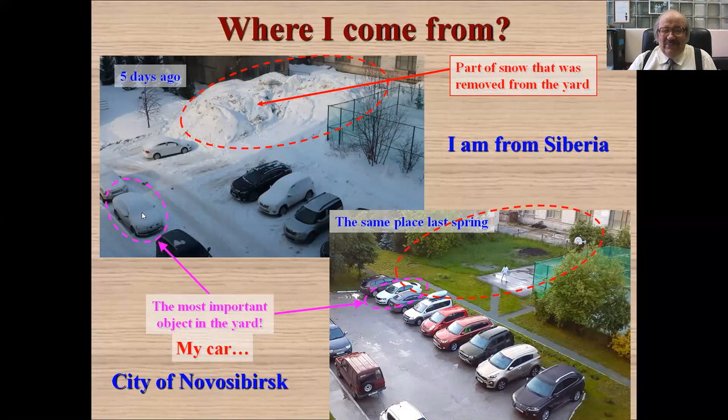I'm glad that this seminar is joined with the Australian Fluid Mechanics seminars. But I'm not from Australia, I'm from Siberia, which is also quite an interesting place. I'll show this picture just so you can see what we had five days ago: a huge heap of snow just removed from the yard, which started melting yesterday or two days ago. The same place in spring looks like this - so this is just snow. And the most important object in this picture is my car, standing under the snow here in the yard.

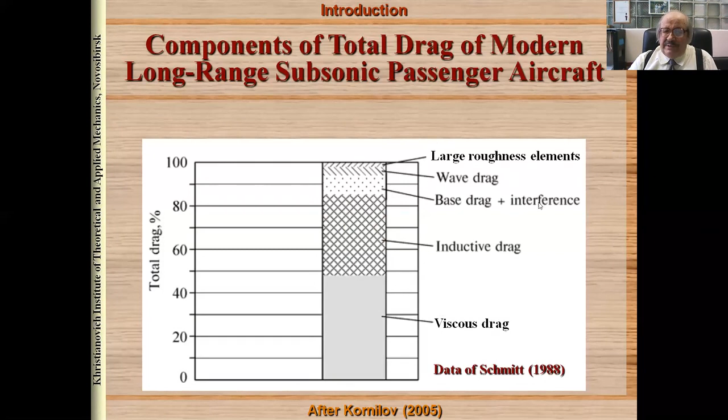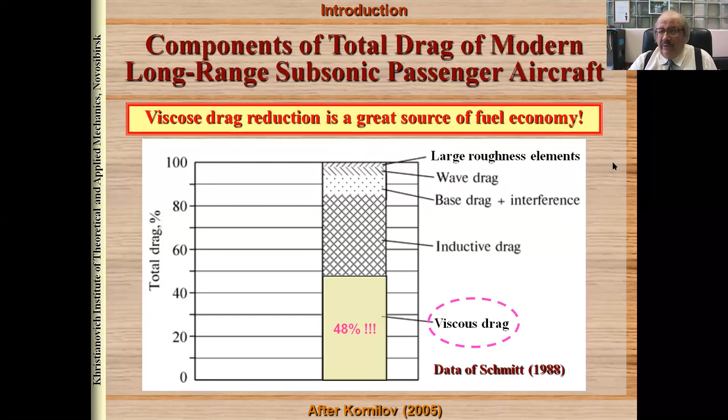I want to show this classical graph: skin friction coefficient versus Reynolds number for a flat plate. The upper curve corresponds to turbulent flow, and the lower corresponds to laminar flow. Modern airplanes fly approximately at these large Reynolds numbers. For large airplanes, the difference between turbulent and laminar friction is more than one order of magnitude - a very significant difference. It remains large even for small airplanes and gliders.

If we look at the boundary layer going from the leading edge downstream, initially the flow is usually laminar. Then we have transition to turbulent flow and friction increases dramatically. If we're able to postpone transition, then in a certain Reynolds number range we have so-called laminarization, and the friction is reduced dramatically. This is already partly achieved for small airplanes and gliders - they have laminar flow around a significant part of their surface, and due to this, the skin friction is very low.

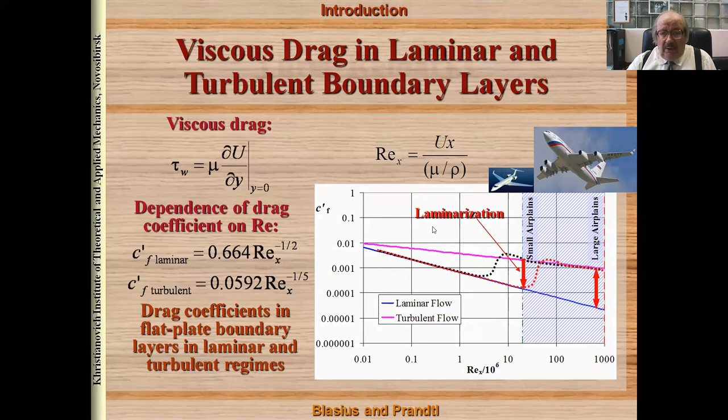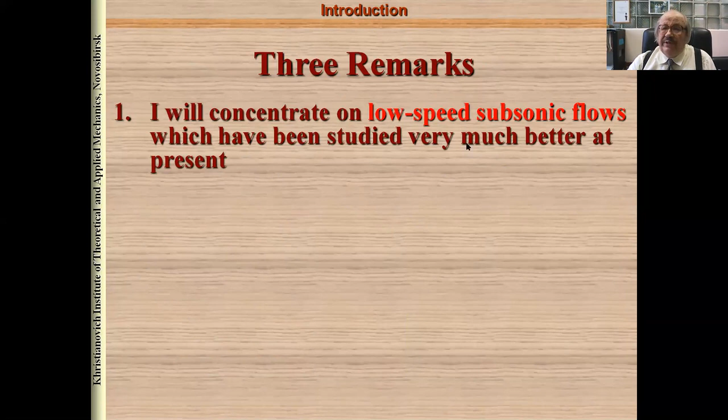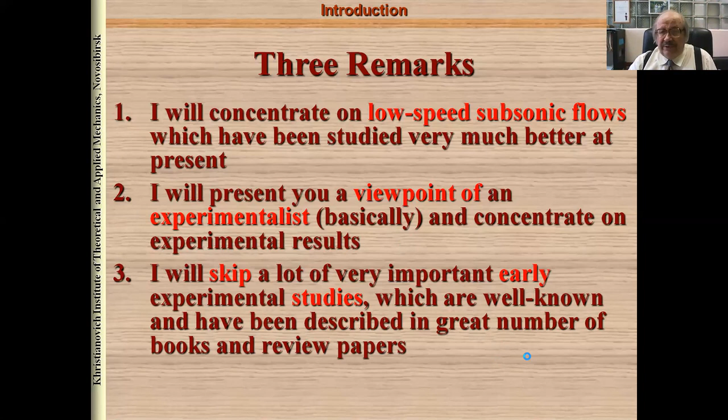Prior to starting the main part of my talk, I want to make three remarks. First, I will concentrate on low-speed subsonic flows, which have been studied much better at present than transonic flows. Second, I will present the viewpoint of an experimentalist, and concentrate on experimental results. Third, I will skip a lot of very important early experimental studies, which are well known and described in a great number of books and review papers, and concentrate on relatively recent data obtained during past years.

A swept wing boundary layer has several kinds of instabilities, which I will try to describe now. This is actually what swept wing means - an idealized arrow-shaped wing, idealized in the sense that nothing depends on the span-wise coordinate. This is a plan view, so all geometrical parameters are the same in the span-wise direction. The potential flow also has a very special property.

If we decompose the velocity vector into two components, the span-wise component, parallel to the leading edge, is constant everywhere in the whole flow field, excluding the viscous boundary layer. This constancy is often called the sweep condition. The sweep condition is satisfied for an infinite-span swept wing at any sweep angle. The other component, perpendicular to the leading edge, is of course not constant.

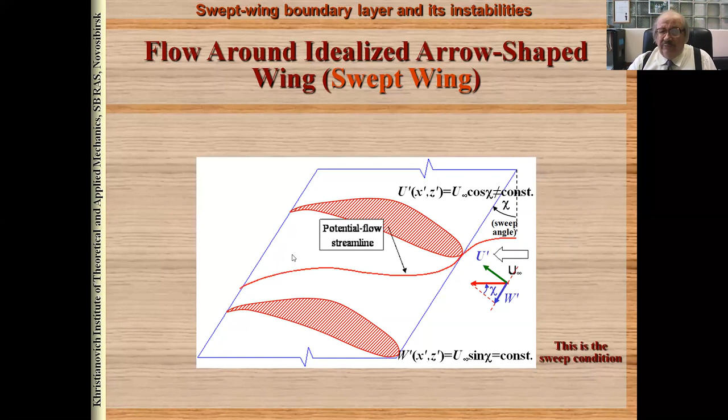The flow accelerates initially, then decelerates, and therefore the shape of the streamline of the potential flow and viscous flow is curved - so-called S-shaped. This curvature is produced by pressure gradient forces, shown here. The same forces act on fluid particles inside the boundary layer, which have lower speed due to viscosity. But since the same force acts on a particle with lower speed, the trajectory changes differently. Therefore, inside the boundary layer, the particle trajectory deviates from the trajectory outside, and this mismatch leads to the appearance of so-called crossflow, directed as shown here - this near the leading edge, and this near the trailing edge.

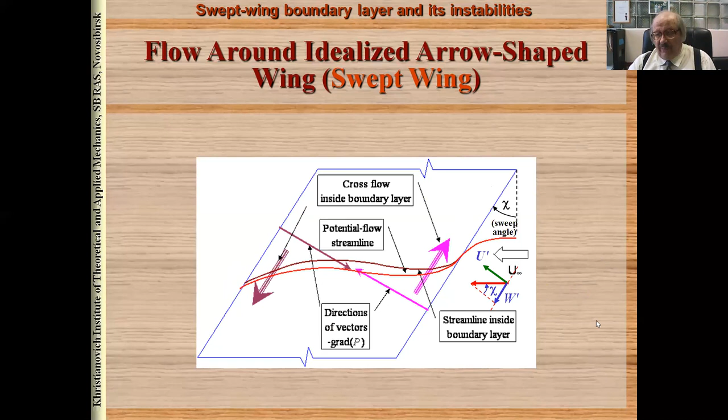Inside the boundary layer, we have a mean velocity profile which is rotating, I would say. The vector is rotating as we approach the wall. At the boundary layer edge, this is a coordinate system with a prime, which is coupled with the velocity at the boundary layer edge, directed as shown here, then closer to the wall the direction is changing. We can decompose it into the component in the direction of the potential flow and an orthogonal component. The orthogonal component is the crossflow itself.

And this profile has an inflection point, and this is always a sign of additional instability. This flow in 3D, in this 3D boundary layer, is usually more unstable compared to the corresponding 2D boundary layer. So there are several instabilities of this flow.

First, when the flow just touches the leading edge, if the thickness of the aerofoil is large, then we have a boundary layer flowing along the leading edge. And this boundary layer can be unstable.

This instability is often called attachment line flow instability. Then further downstream, we have a region of so-called favorable pressure gradient when velocity increases. Here, we can observe basically two kinds of instability: crossflow instability and streamline curvature instability.

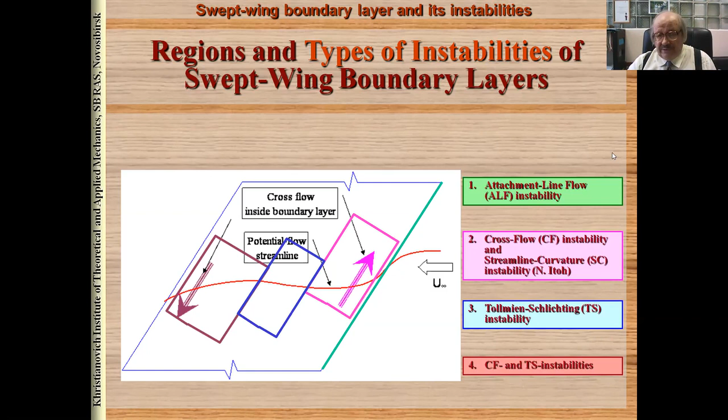Further downstream in the region of nearly zero pressure gradient, Tollmien-Schlichting instability may occur. And closer to the trailing edge, we often have a competition between crossflow instability and Tollmien-Schlichting instability. They both can play a significant role.

But for so-called long laminar run airfoils, the region of favorable pressure gradient is enlarged. The main goal is to suppress Tollmien-Schlichting instability. But the same pressure gradient which suppresses Tollmien-Schlichting instability leads to intensification of crossflow instability. The stronger the pressure gradient, the greater is this instability.

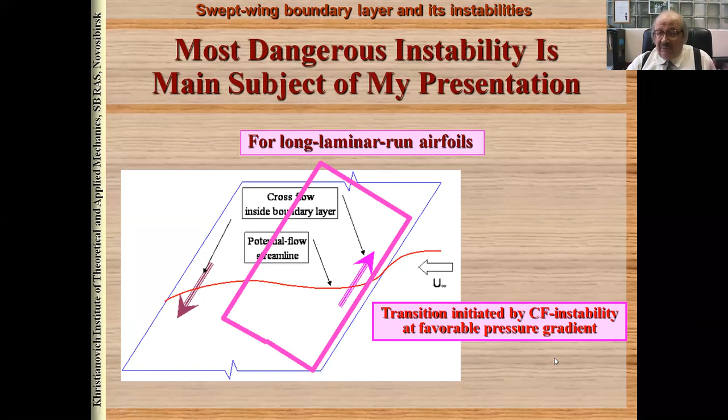In my talk today, I will concentrate on this kind of instability, despite I'll touch also some Tollmien-Schlichting instability as well. So how do the crossflow instability modes look like?

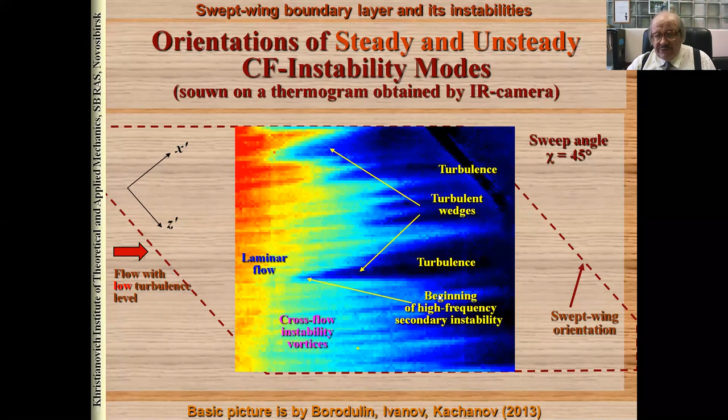I will illustrate this on this picture. This is a visualization obtained by infrared camera on a 45 degree swept wing in our institute, in our group. In case of low turbulence level, we have turbulent flow here, laminar here. We can see turbulent wedges. And the crossflow in this case is directed as shown here inside the boundary layer.

This arrow shows the local direction of the potential flow velocity vector. Stationary crossflow instability modes, which also can be amplified as zero frequency modes, usually have the axis of vortices nearly parallel to the local direction of potential flow, but not exactly. They always deviate from it by approximately 2 degrees.

But there are also traveling crossflow instability modes, which can be amplified by the instability mechanism. The most dangerous of them are indicated here. They exist in a range of propagation angles, and they propagate like shown here. So they propagate in the direction opposite to the crossflow direction. And in fact, they approach the leading edge of the airfoil.

There is another group of crossflow waves, or unsteady crossflow instability modes, which propagate in the direction of the crossflow and towards the trailing edge of the airfoil. But this second group of traveling crossflow modes, the flow is less unstable with respect to this group, so it's usually less dangerous.

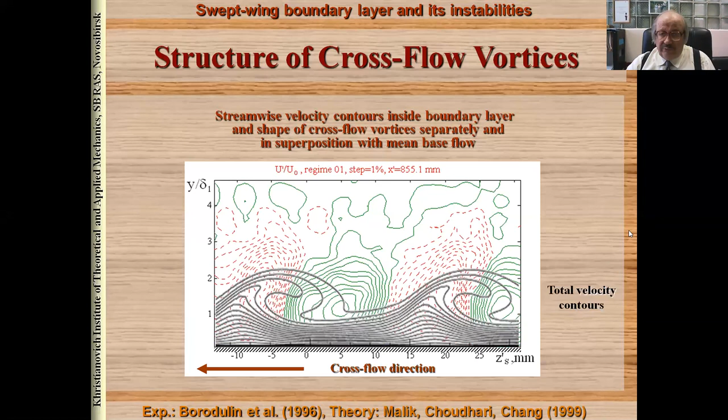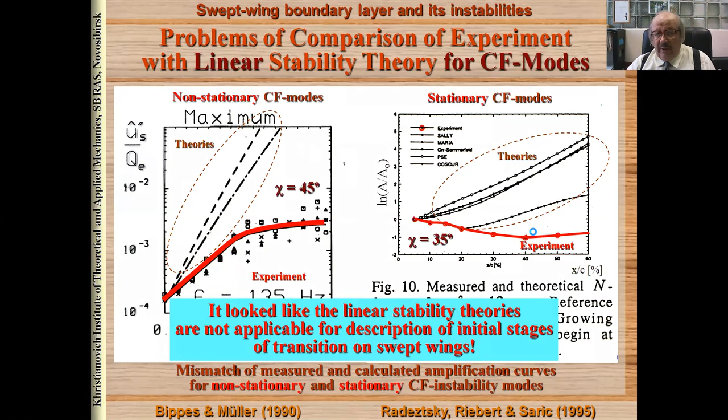Red curves show experimental amplification curves, the distribution of amplitude in the chordwise direction, while other curves display theoretical results from linear stability theory. We can see very significant mismatch of this data. It looked like linear stability theory is not applicable for description of initial stages of transition on swept wings.

We started our experiments on cross-flow instability in the end of the 80s, and the majority of experiments were carried out in this wind tunnel of our institute in Novosibirsk, called T324. This is a very good low turbulence wind tunnel, and this is our first experimental model.

We accepted and used the idea of Bill Saric. Instead of a real swept wing, we made a swept plate, and the pressure gradient along this plate in the chordwise direction was induced by a contoured wall bump. We also added side walls, which help diminish the influence of the test section walls and provide better satisfaction of the infinite swept wing condition.

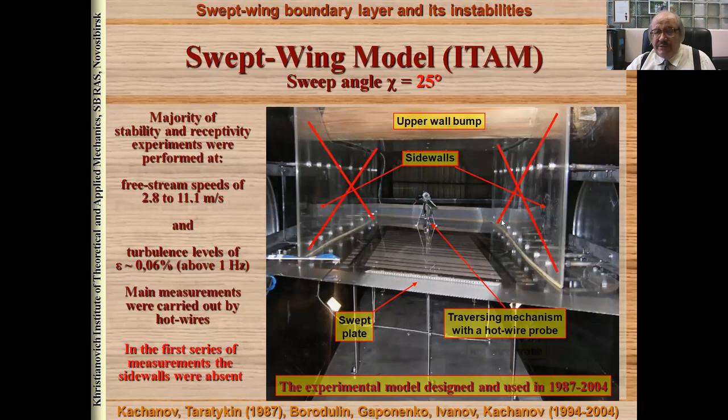In the first experiment, this was for a sweep angle of 25 degrees, and side walls were absent. Then we designed another model for 35 degrees, with a very similar design.

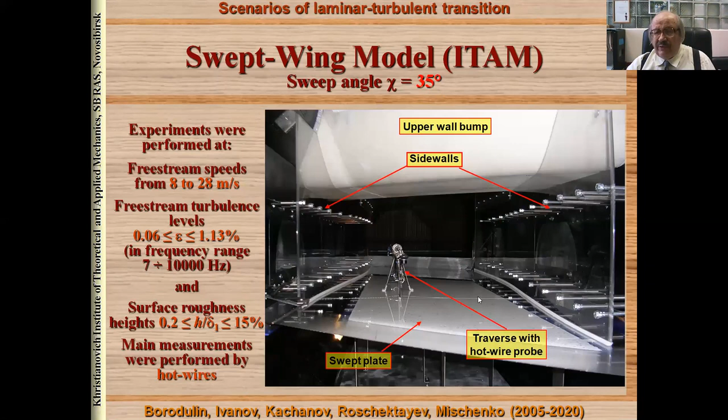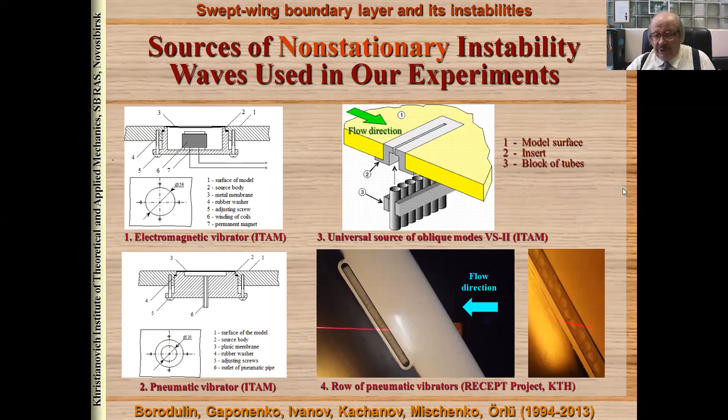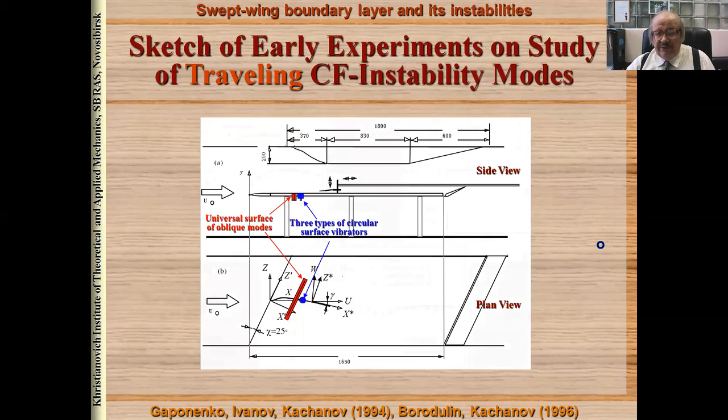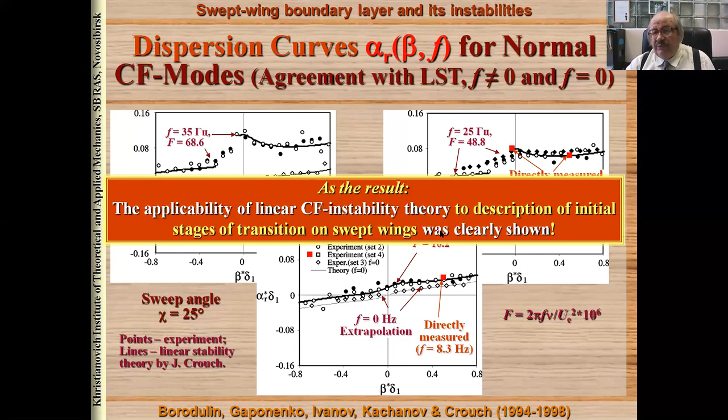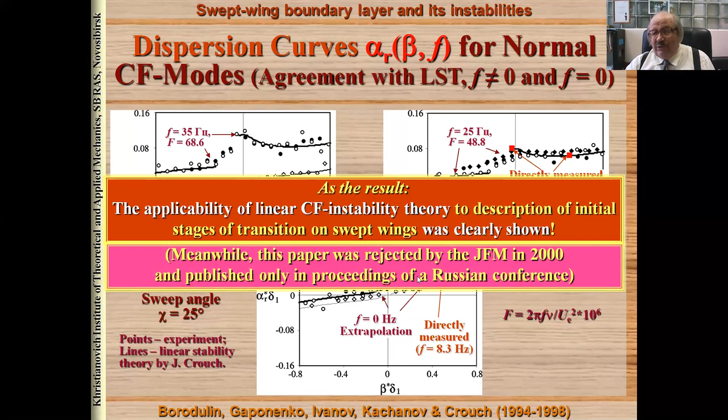As a result, the applicability of linear crossflow instability theory to description of the initial stages of transition on swept wings was clearly shown in these experiments. But unfortunately, this paper was rejected from JFM in 2000, although the results were obtained in 1995. It was published only in the proceedings of one of the Russian conferences.

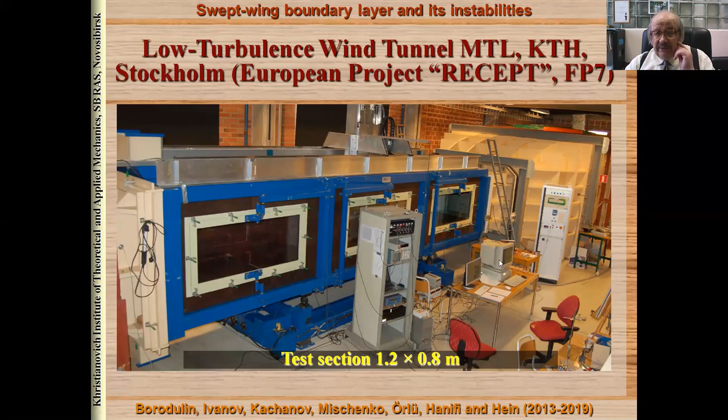Later, we repeated similar experiments, but not on a swept plate, on a real swept wing. These experiments were carried out in the framework of the European project RECEPT, Framework Program 7, in Stockholm, in the MTL low turbulence wind tunnel. This is our experimental model, equipped with a 35 degree swept airfoil section, and it was equipped with side walls to provide better satisfaction of the sweep condition.

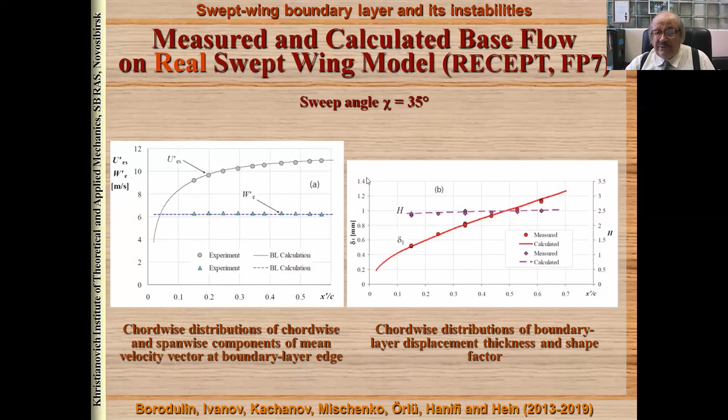Our theoreticians, Ardeshir Hanifi and Stefan Hein, performed calculations, the same for the boundary layer, and as a result we obtained perfect agreement between theory and experiment.

I show here amplification curves, circles, and the stream-wise, chord-wise distribution of the phase of perturbations for two different span-wise wave numbers and one fixed frequency, and this is the same for another frequency, very low, actually 2 Hertz. Curves are calculations, points are our experimental results. We have very good agreement between theory and experiment.

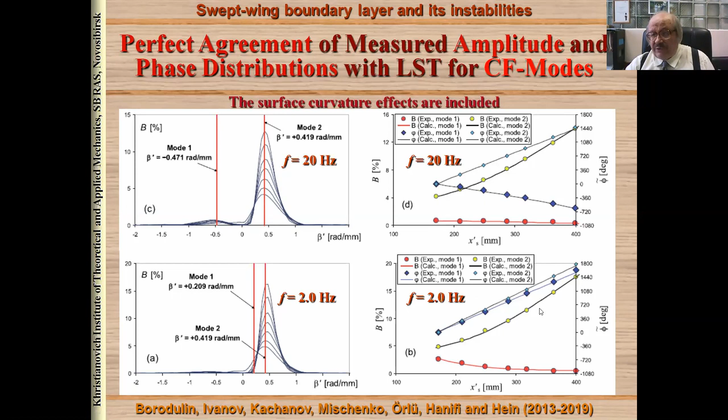2 Hertz is what we call a quasi-stationary regime, because the flow passes several times through the whole region of our measurements during one cycle of oscillation. So in effect these are crossflow vortices, very low frequency disturbances.

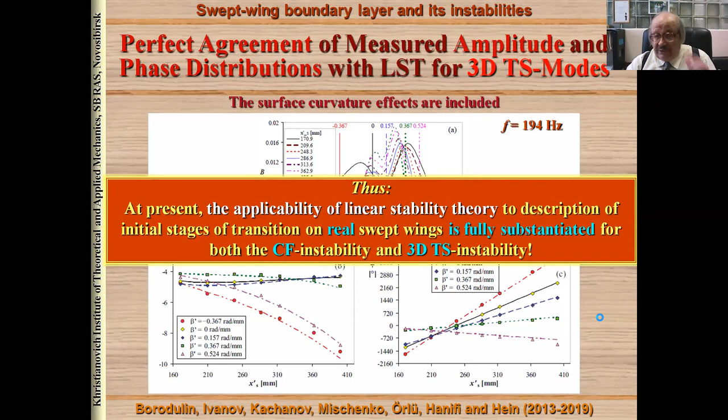The next section of my talk is about mechanisms of excitation of instability modes. Such mechanisms are usually called receptivity mechanisms. This is the problem of receptivity of the base flow to external perturbations of different kinds. This problem is very complicated.

You see we have a lot of mechanisms, and if you want to predict, to calculate correctly the transition location, we must know which of these mechanisms are important and which are less important. Of course, the importance depends on the base flow characteristics and disturbance characteristics. So this is not a simple problem at all. In our experiments we investigated a lot of these mechanisms.

I will illustrate these results for two cases. The first case is receptivity to surface non-uniformities, either stationary or non-stationary, meaning vibrations.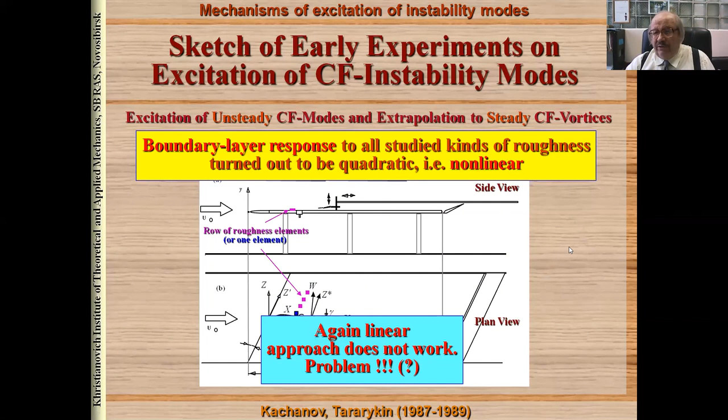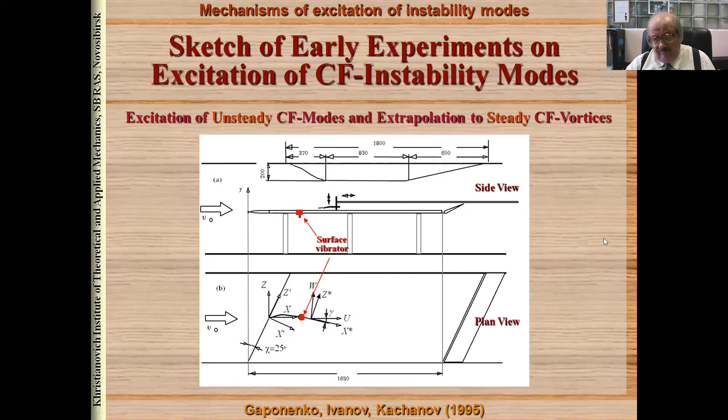We were not able to obtain results, and it looked like we could not investigate the linear receptivity problem and check the validity of linear receptivity approaches. But we decided to do it differently. We decided to replace our stationary disturbance sources by non-stationary ones, first of all by surface vibrators, and then we studied receptivity with respect to non-stationary perturbations. We got quite good results.

Then we found that the receptivity coefficient, defined as the ratio of the initial spectrum of disturbances divided by the resonance spectrum of surface vibrations, depends nearly linearly on frequency. We extrapolated our data to zero frequency and obtained in this way the receptivity coefficients for stationary modes, for steady surface roughness and stationary vortices.

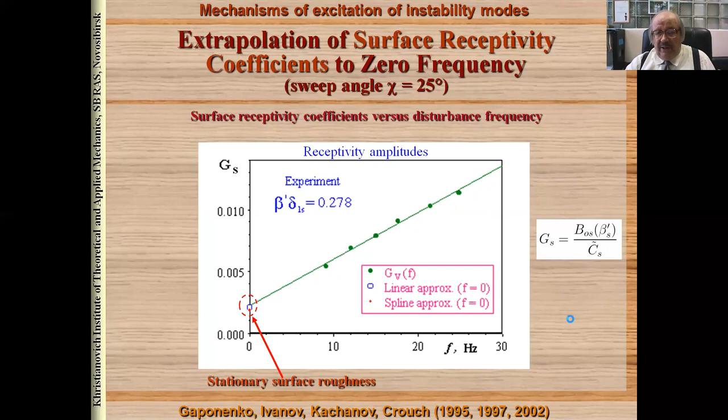And the result we compared again with calculations by Jeffrey Crouch. You can see here the initial spectrum and here the receptivity coefficients. Taking into account the great complexity of obtaining this coefficient, which includes extrapolation of data upstream to the position of the source, we think that this agreement is rather good.

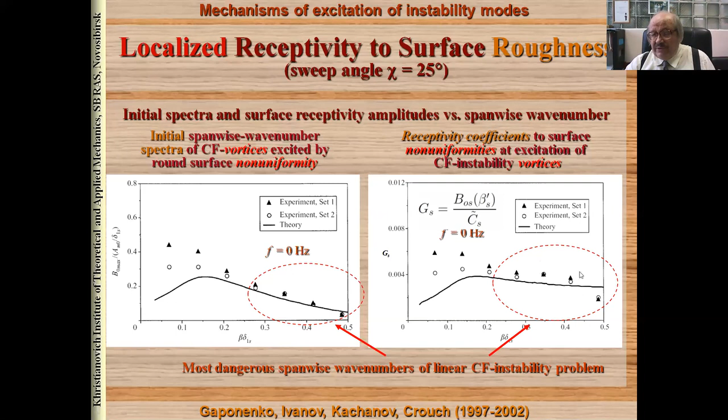This result shows that it was actually the first evidence of applicability of linear receptivity theory of a swept-wing boundary layer to surface non-uniformities at excitation of crossflow instability modes, both stationary and non-stationary. This paper was published in JFM in 2002.

Another important receptivity case I want to show you is receptivity to incident flow turbulence, which can scatter either on natural base flow non-uniformity or on surface roughness or on surface vibrations.

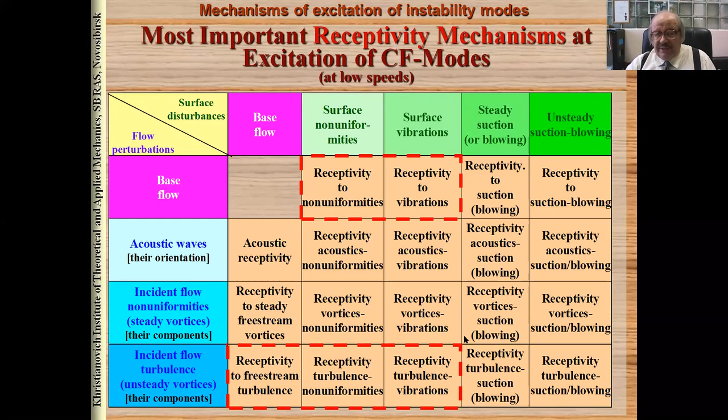So we studied all these cases, at least for the case of 25 degrees swept angle and also 35 degrees. And I just want to explain the formulation of the experimental problem.

So we have a vortex street propagating along the boundary layer edge. And then these vortices interact, for instance, with the flow in the vicinity of the surface roughness, this non-uniformity. And these vortices are transformed into cross-flow instability modes, which have the same frequency.

Then we studied the case when the non-uniformity is non-stationary, when it oscillates at frequency F. And in this case, scattering of free-stream vortices occurred at combination frequencies, F vortex plus or minus F surface. And we also studied this problem.

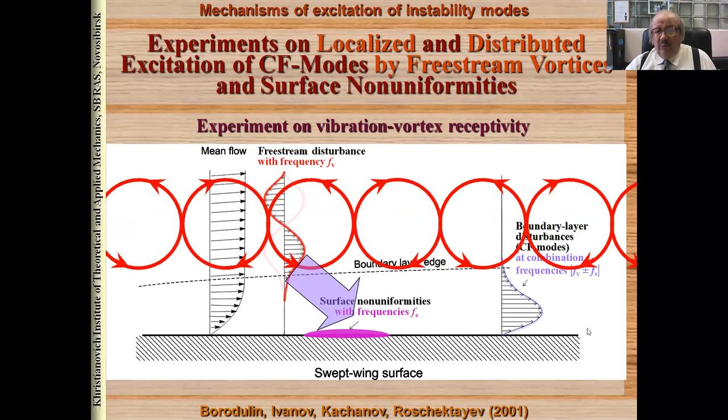And one more interesting problem is when the scattering occurs on natural non-uniformity of the base flow. This is already a distributed vortex receptivity problem. The excitation occurs not in one point or in a small vicinity of streamwise coordinates, but everywhere. And newly excited disturbances are superimposed with previously excited ones, and so on. We investigated this problem as well.

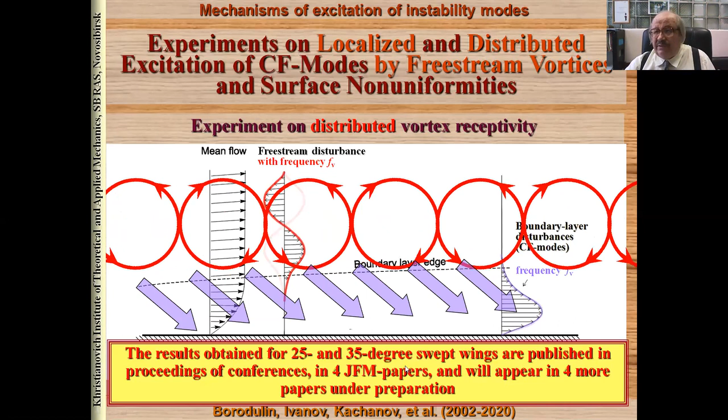As a result, for 25 and 35 degree swept wings, we published 4 JFM papers and also some conference papers, and we are preparing more papers which will appear very soon. Unfortunately, I cannot describe all details of the results in this field - this is for an additional talk.

But what is interesting is to analyze and compare the efficiency of two receptivity mechanisms: the surface receptivity amplitude coefficient, and the surface vortex receptivity amplitude coefficient. These coefficients are defined slightly differently.

For the case of surface vortex receptivity, with the initial spectrum of excited disturbances, we divide by the resonance spectrum of surface non-uniformities and by the amplitude of the free-stream vortex. So these coefficients are not directly comparable.

But if we fix the value of the free-stream vortex, then we can compare these coefficients and say which receptivity is stronger. We found that these two kinds of receptivity coefficients become comparable only at extremely high free-stream vortex amplitudes, around 50%. But at this vortex amplitude, our linear receptivity mechanism is hardly valid - this is actually outside the region of validity of our approach.

But if the free-stream vortex amplitude is weaker, like 15%, then we can see that the surface vortex receptivity is nearly always weaker than the receptivity to surface non-uniformities. And especially for lower vortex intensity, the surface vortex receptivity coefficient is even lower. So we can conclude that in general, scattering or excitation of cross-flow instability modes by surface non-uniformities is more efficient than excitation of similar modes by free-stream vortices due to scattering on surface non-uniformities.

So now let me discuss scenarios of laminar-turbulent transition. This is an important point. Initially, I will describe the case of low turbulence level - LTL means low turbulence level.

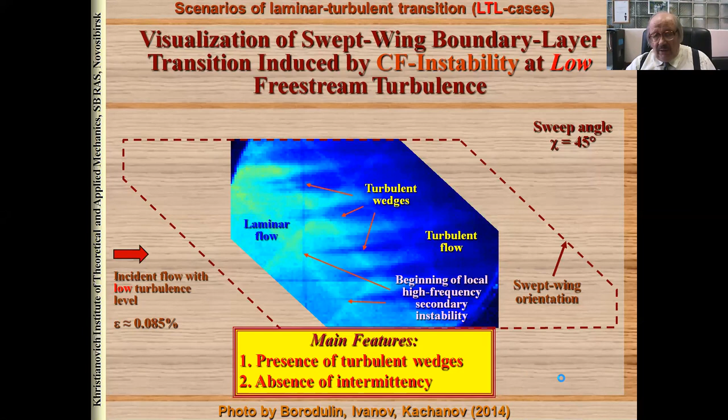How does the transition occur? Actually, we almost always observe development and amplification of stationary cross-flow vortices, and then a sudden rise of very high frequency perturbations, a very rapid increase of the amplitude. This was observed in many experiments prior to us, in particular Kobayashi's experiments and many others.

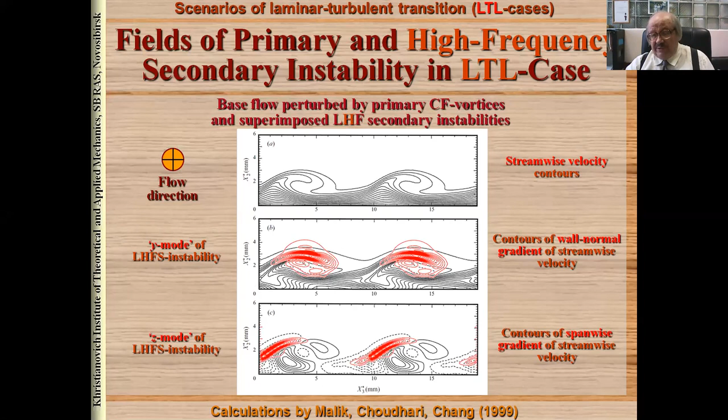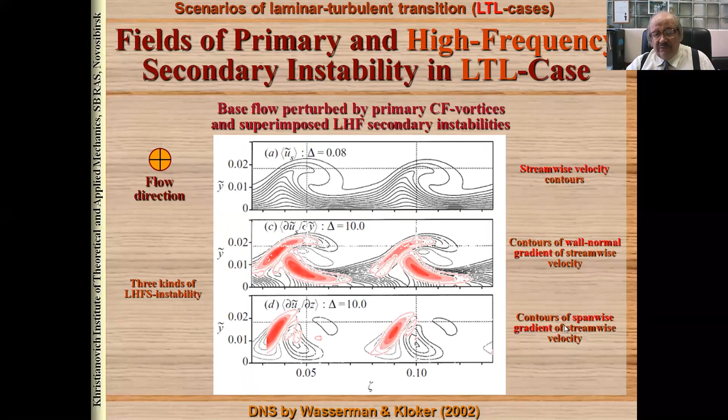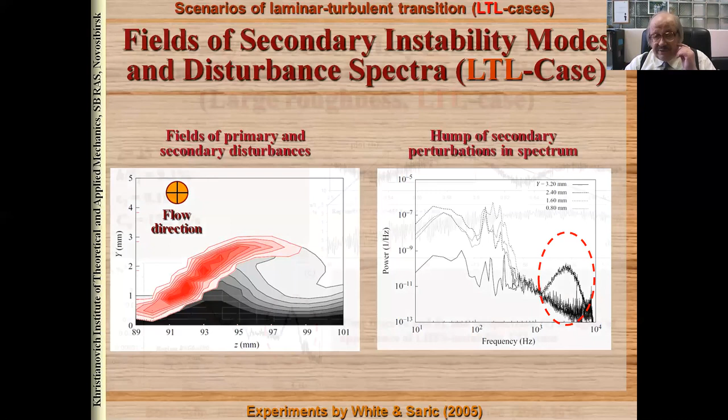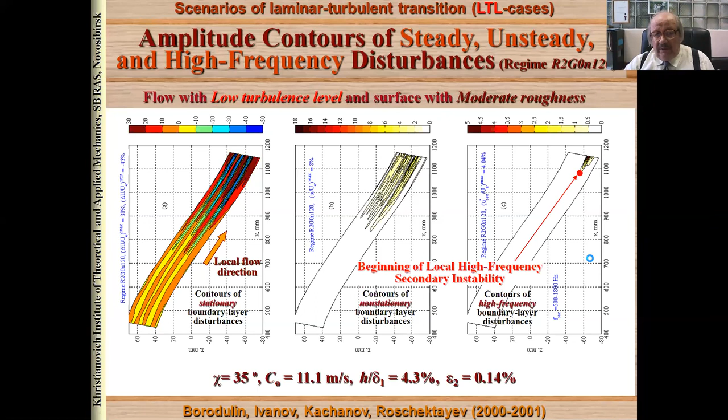Now, what is going on in case of enhanced turbulence level? By enhanced level, I assume the level higher than 0.1%, but below 1%. For example, in this case, 0.85%. Again, visualization by infrared camera of transition, at sweep angle of 45 degrees.

The most typical features of this transition now are nearly opposite to those found at low turbulence level. So we have absence of turbulent wedges, no wedges clearly visible, but we have presence of strong intermittency, which was absent in the low turbulence level case.

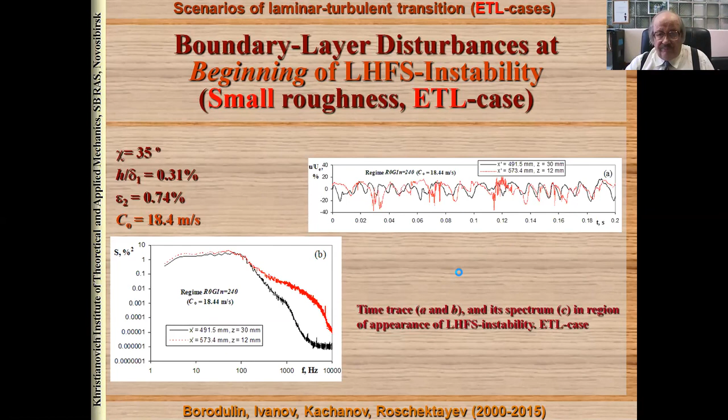In this experiment there is a very peculiar point, very important for experimentalists. We obtained all our enhanced turbulence levels by means of turbulence generating grids, because we have a low turbulence wind tunnel. We put a grid at the inlet of the test section, and we enhance the freestream turbulence.

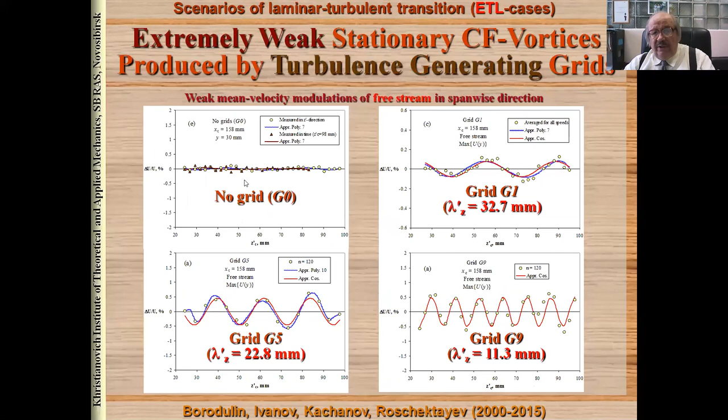You can see now large amplitudes of steady vortices. I want to emphasize that we have a very smooth surface. Without the grid, we don't have any significant stationary roughness—the surface roughness is very smooth. In the previous case I showed, this roughness was not able to produce any vortices. But now we see that steady vortices are present, and they are produced by the grid, not by roughness.

We also have very large amplitude traveling modes, which clearly interact with stationary vortices and are span-wise modulated. And we have appearance of high-frequency secondary instability at some particular span-wise locations. These are apexes of turbulent wedges, so we again have turbulent wedges.

I call this a trap for experimentalists. So if you use turbulence generating grids to investigate the influence of turbulence levels, you must very carefully measure the properties of stationary disturbances produced by these grids.

This transition is produced by grids on a smooth surface, grid G1 and G9. And this is also produced by grid G1 on a smooth surface. But the scenarios of transition are completely different.

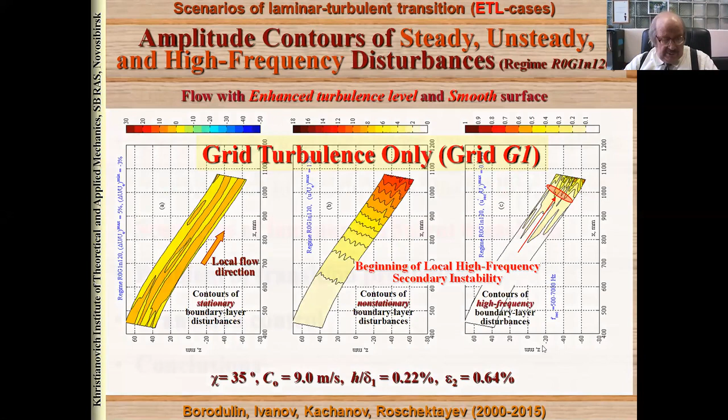Now let me say some words about the problem of transition prediction. The classical standard method, starting from the 1950s, is the n-factor method. N-factor is the ratio of the logarithm of amplitude at a certain x position divided by the initial amplitude, which is taken near the first branch of the neutral stability curve.

This method assumes that the n-factor at transition is constant. For instance, if you believe transition occurs when n-factor equals 4, you calculate your amplification curve and find where it becomes equal to 4, and you assume transition will start there. But I want to note that in this case, the amplitude of disturbances at transition is not constant at all. Moreover, n-factors at the transition point vary between 4 and 16.

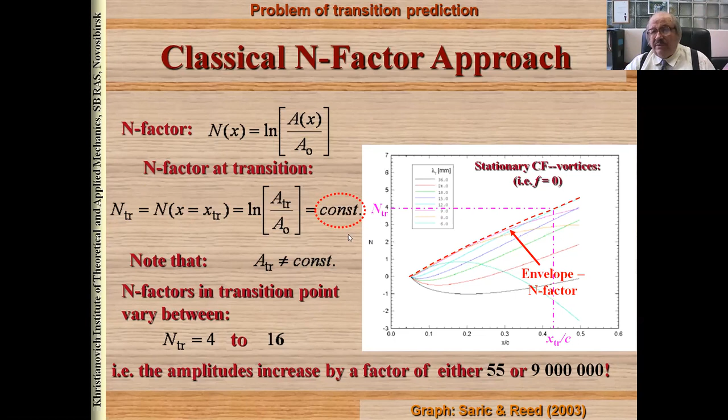4 is for crossflow instability, as on swept wings, and 16 is for very good gliders with Tollmien-Schlichting waves. This means the amplification factor ranges from 55 to 9 million, and this factor is assumed to be constant. Therefore, of course, this is not a very satisfactory approach.

In 1997, Jeffrey Crouch suggested another method, called the variable n-factor approach. This approach is based on the proved validity of linear stability and linear receptivity mechanisms. If they work, it's very easy to obtain these formulas, which assume linearity of receptivity and stability mechanisms, and also independence of receptivity coefficients—constancy of the receptivity coefficient over a certain range of parameter variation.

So the n-factor at transition equals a certain reference n-factor minus the logarithm of the dimensional amplitude of surface roughness. This is for the case when transition is produced by stationary crossflow vortices excited by surface roughness. In another case, when transition is initiated by free stream turbulence and roughness doesn't play a significant role, the formula looks different: n-factor at transition equals a reference n-factor minus the logarithm of free stream turbulence. Of course, this approach works only when transition is produced by roughness only, or by free stream turbulence only, separately.

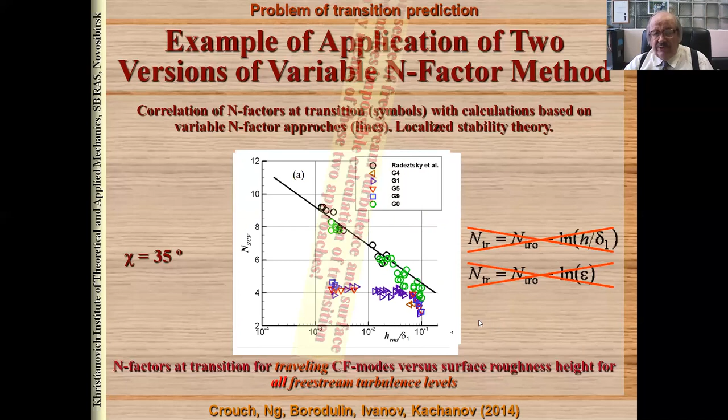But in the general case, when we have both modes—traveling and stationary—and both can be important, none of these formulas work. We have a quite more complicated picture, which cannot be described easily, so it's impossible to apply these formulas in this case.

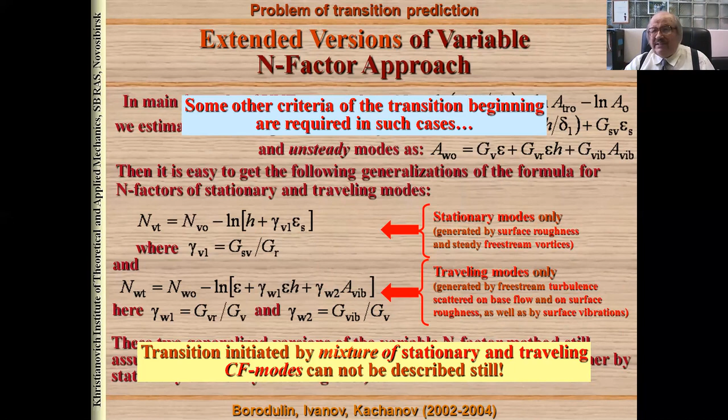This n-factor approach can be improved if we take into account other mechanisms of receptivity, but it remains invalid when we have a mixture of stationary and traveling cross-flow instability modes. For this case, we need other criteria of transition beginning. These are required, and we performed a lot of experiments trying to find a simple criterion, because we cannot measure instantaneous velocity gradients, which may be the main reason for secondary instability. It's impossible to measure simply, but we need some very simple criteria, and we assumed this criteria had to be searched for.

This might be one of the amplitudes of perturbation. Here you can see amplitudes of stationary cross-flow vortices at transition, at the beginning of secondary instability. These amplitudes vary more than one order of magnitude, 30, 40 times - they are not constant at all. Then stationary and non-stationary disturbance amplitudes at transition again vary very much depending on surface roughness height and free stream turbulence level.

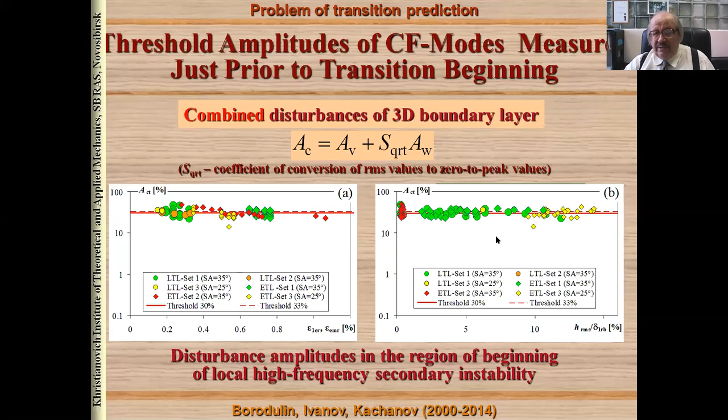But we found that if we introduce so-called combined amplitudes - just the sum of instantaneous maximum deviations produced by stationary and non-stationary perturbations - we call this combined amplitude. These amplitudes show quite good constancy at the point where we have the beginning of flow turbulization, and this amplitude is around 30%. So we found this criterion, this universal criterion for swept boundary layer turbulization, and based on it some new transition prediction approaches are being developed at present.

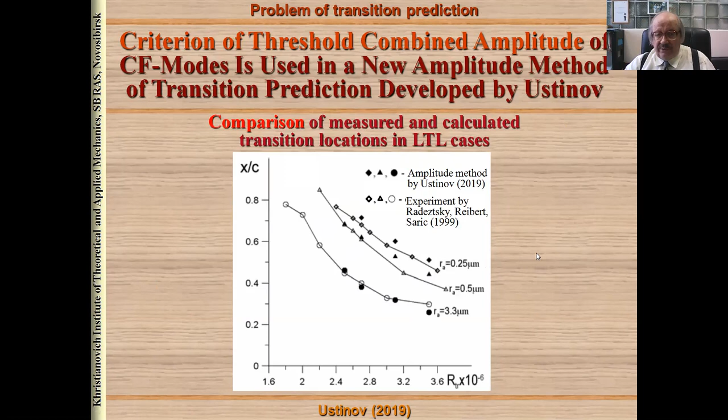I will show only one example, I don't have time anymore. The criterion of threshold combined amplitude is used in the amplitude method of transition prediction developed by Maxim Ustinov in TsAGI. I show only one figure, obtained for the LTL case, low turbulence level case - comparison of his calculated transition location, black symbols, with results obtained by Saric and colleagues. Very good agreement.

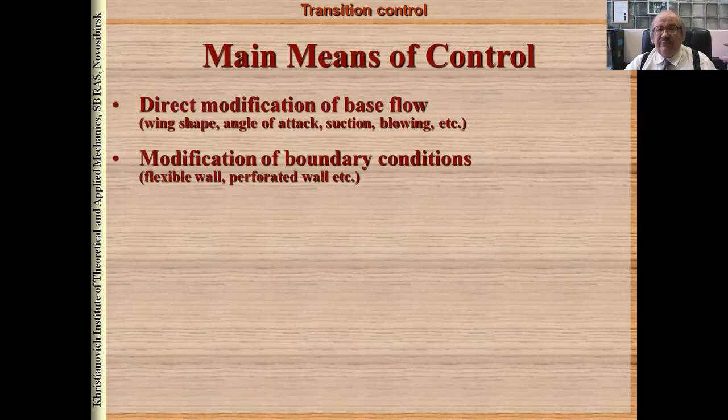And several words about transition control. Unfortunately I don't have time, so I just want to say that we can classify different means of transition control into 4 different kinds: direct modification of the base flow, like change of shape of the airfoil or angle of attack; modification of boundary layer conditions, flexible walls for instance, method of disturbance superposition, interactive control; disturbance suppression via receptivity mechanism - this is a relatively new approach, so-called acoustic or vortex autodestruction; and also base flow modification by means of excitation of stable or weakly unstable disturbances.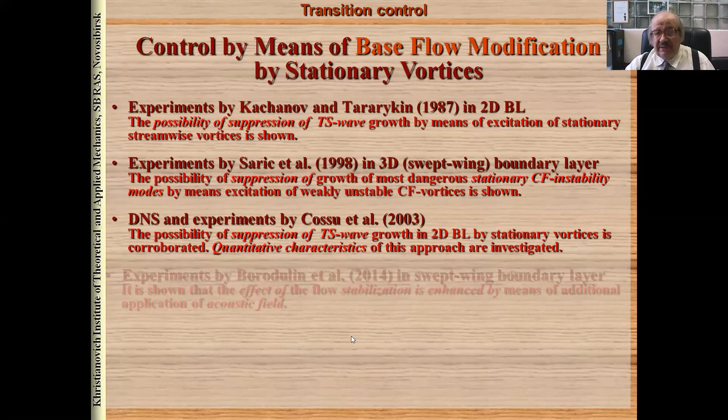So I will slightly concentrate on this case. I skip the history and description, but Bill Saric suggested this approach for the case of a 3-dimensional boundary layer, and recently we found one more result related to this mechanism in our experiments, which I will show you briefly.

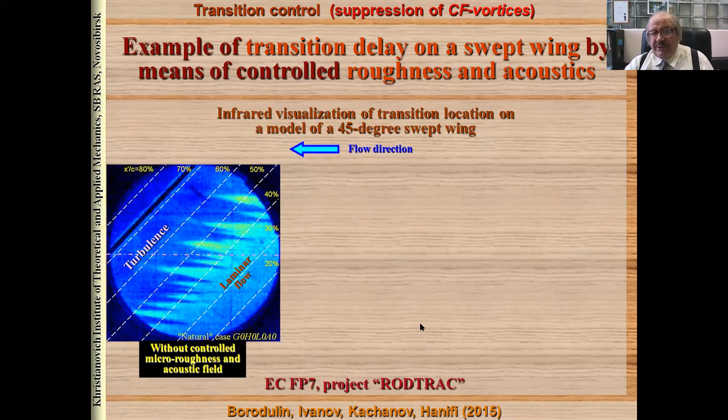This is a 45 degree swept wing. We performed visualization by infrared camera, and you can see here flow from right to left, laminar and turbulent, low turbulence level case. This is without control. This is with control by Saric's method - we put here some patches, roughness elements, a row, and you see the transition move downstream.

And we wanted to understand how robust this method is with respect to acoustic excitation. We excited different acoustic waves and found nearly no influence. But in a certain, rather narrow frequency range, we found that acoustics is able to stabilize the flow even more. So the joint influence of these roughness elements and acoustic waves nearly removed turbulent flow from our model. Here we have a trip device, 70% of chord. This was an unexpected result, which is still not explained by theoreticians.

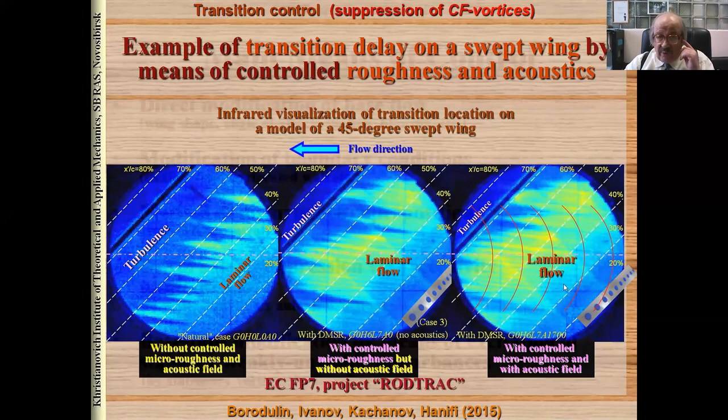And one more case I will slightly describe is disturbance suppression via receptivity mechanism. I think the first who found this mechanism was Kosorygin many years ago - he found that putting some patches onto the surface, some roughness elements, is able to move transition downstream. This was called auto-destruction. A similar result was obtained later at Stuttgart University, but for free-stream vortices, for predominant free-stream perturbations.

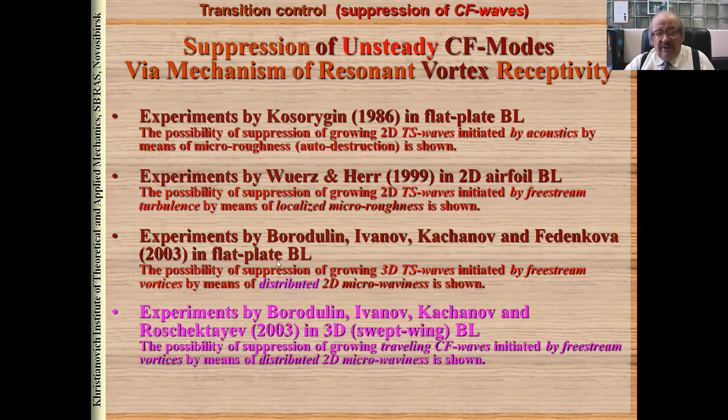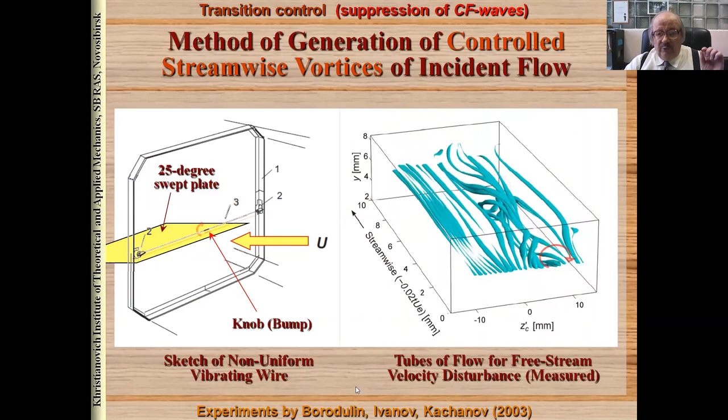And recently we also obtained a similar result for the distributed receptivity mechanism case, when we don't have any roughness elements but we have waviness of the surface. We excited streamwise elongated free-stream vortices by a vibrating wire with a non-uniformity - the vortices look like this. And we put also waviness onto the surface, which was spanwise uniform, and scattering of these vortices onto the surface waviness was able to stabilize the flow.

The matter is that in 2-dimensional boundary layer, free-stream vortices always propagate faster than instability modes. But in 3-dimensional boundary layer, this is not the case. So the free-stream vortices can propagate with the same speed.

And in this case, we can either suppress or enhance traveling instability modes by just the presence of the right roughness. And this is an example of the result.

This is the development of the cross-flow instability mode downstream, amplitude versus chord-wise coordinate, in absence of control, and this is in presence of control. So we are able to suppress growth of traveling modes just by putting roughness.

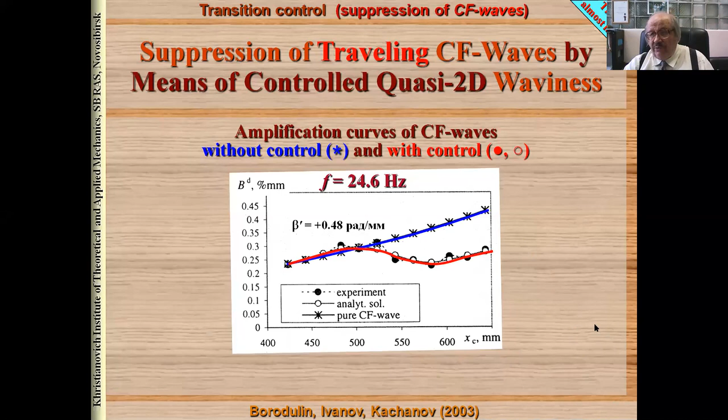And I come to the conclusions. First, the linear stability and linear receptivity theories are applicable to description of cross-flow and Tollmien-Schlichting modes in swept-wing boundary layers. This is proved. Main sources of cross-flow vortices are roughness and stationary free-stream vortices.

The second point was unknown previously, or weakly known, I would say. We showed this clearly. Main sources of traveling cross-flow waves are surface vibrations, first of all, but also free-stream turbulence, which can scatter on surface vibrations.

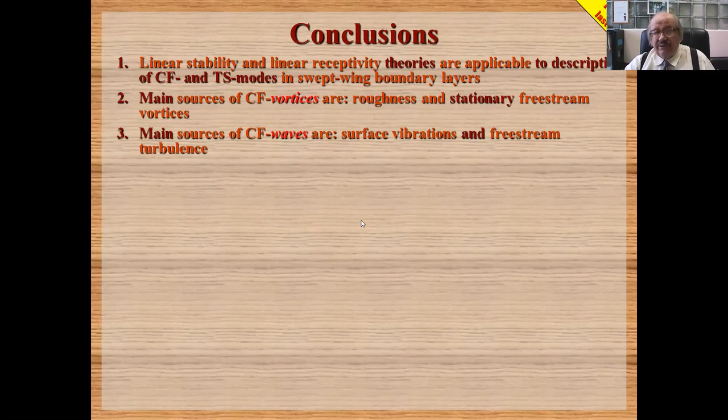Turbulization of three-dimensional laminar boundary layer always starts with localized high-frequency secondary instability, excluding cases of abrupt transition. Well, roughly speaking, if you put a finger into the flow, this is a different scenario.

Secondary instability appears when the sum of maximum amplitudes of steady and unsteady cross-flow modes exceeds a certain threshold of about 30%. This is a very important criterion. It works in a great number of cases.

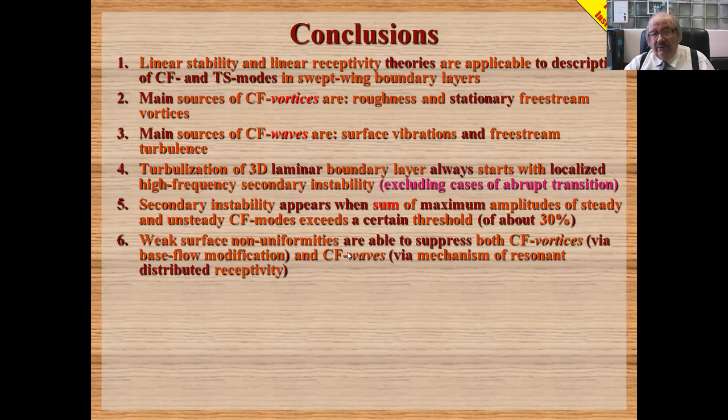Weak surface non-uniformities are able to suppress both cross-flow vortices via base flow modification, as in Saric's experiment, and cross-flow waves via the mechanism of resonant distributed receptivity.

The variable N-factor method of transition prediction works in cases of predominance of surface non-uniformities or predominance of free-stream vortices, but its applicability in cases of comparable amplitudes of steady and unsteady modes is questionable.

And the final conclusion is that the amplitude methods of transition prediction based on the 30% threshold of combined amplitudes are the most promising ones at present, from my viewpoint. However, these approaches need complementary investigation in order to be used for real calculations of transition location.

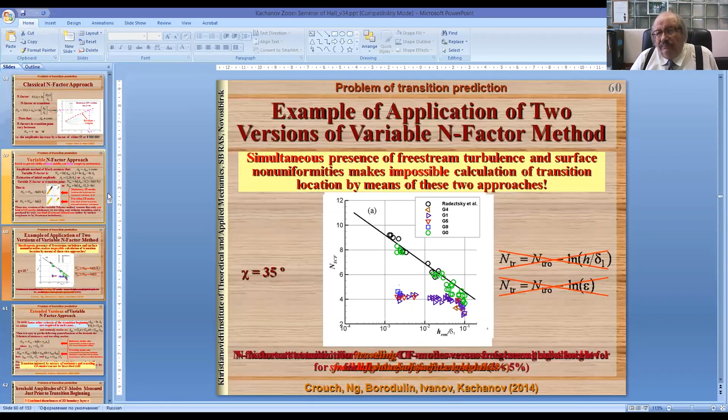Yes. But surely these are not the only controlling, probably not even the most important, parameters, because the shape and the location of roughness would change the transition position. And also intrinsically, it kind of contradicts this separation of control. So using the right roughness, you are going to delay transition, but according to this correlation, it always enhances, causes earlier transition.

So certainly there are a lot of... I completely agree with you. Of course, the variable n-factor approach is the next step after the n-factor approach. And if you compare them, you will clearly see that the variable n-factor approach is better because it

takes into account receptivity, very roughly I agree. It assumes that this formula can be obtained if we assume that the receptivity coefficient is linear, the mechanism is linear, and the coefficient is independent of Reynolds number, span-wise wave number, and also shape. Shape is spectrum - if you decompose it to Fourier space, you get spectrum. Of course spectrum is important, it's clear. If your span-wise scales are close to the most amplified cross-flow modes, they will be important. If you have smaller or larger scales than the most amplified cross-flow modes, they will be less important, it's clear. But this peculiarity we can regard as a next step, more detailed.

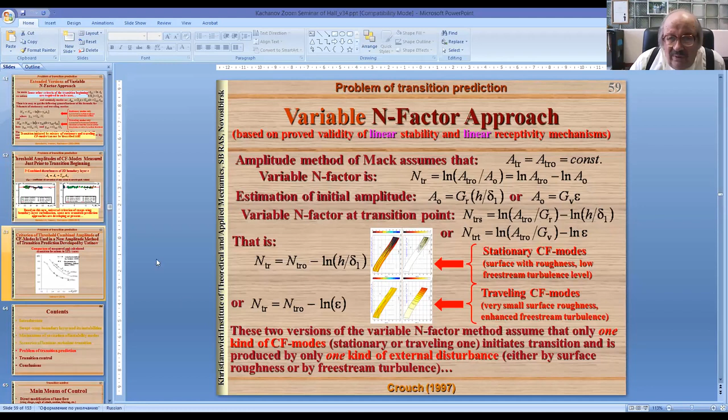Okay, but by the way, this combined amplitude, how do you define it? You just take RMS of the fluctuation, the threshold of combined amplitude - how do you define it? So what we did, I understand the question. This is a formula which we use in a great number of our experiments.

I don't have the plot here, but the amplitude of stationary cross-flow vortices was measured as half of the span-wise modulation of the mean flow produced by these vortices, at the location where we have approximately the maximum cross-flow vortex amplitude. Traveling non-stationary perturbations were measured by hot wire, and we measured the RMS amplitude of them. But then we had to estimate the maximum instantaneous deviation when local high frequency instability can appear.

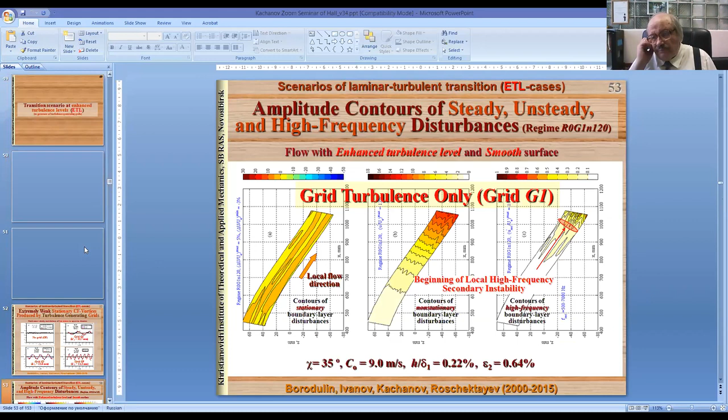Let me first say that this is only a hypothesis. Unfortunately, in this case, the physics of such secondary instability is very poorly studied, both experimentally and theoretically. The majority of people concentrated on cases of low turbulence level with stationary crossflow vortices as primary instability, and the enhanced turbulence case is not very well studied.

We have plans to perform detailed measurements for the case of enhanced turbulence level to prove our hypothesis about similarity of mechanisms of high frequency secondary instability at low turbulence level versus enhanced turbulence level. But at the moment I cannot prove this. We just see that everything looks similar: we have a similar, very rapid rise of high frequency disturbances, but this rise appears only for a short time on top of low frequency primary fluctuations, because this superposition of high shear layers produced by traveling and stationary disturbances is temporary, localized in time and space. Locally we get a flash of high frequency instability. This is our assumption, it is not yet proven.

In the case, or if you apply the, for example... sorry, I can hear the sound disappearing.